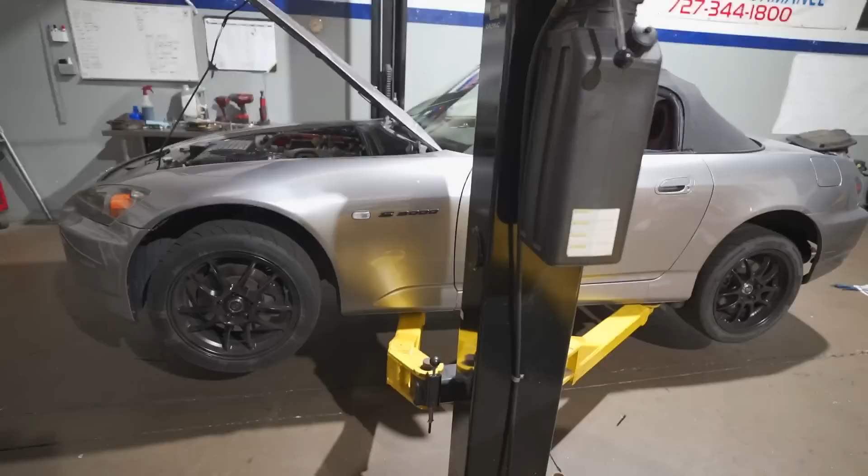2005 S2000, this has 130,000 miles. We purchased this car, it's going to be in a different video. It came with a Comptech icebox on there, so we want to do a comparison between that and the factory AirBox with our AirBox mod.

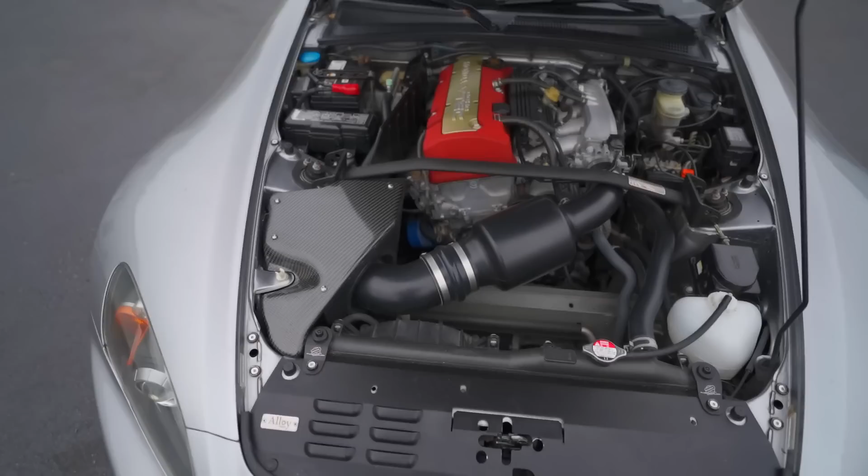That way we can show you exactly what happens. We're going to be kind of surprised ourselves, so stay tuned for the results. We're going to do it all on the same day, no tricks, no trying to sell you one intake over another. We don't sell intakes, so this is a complete unbiased test.

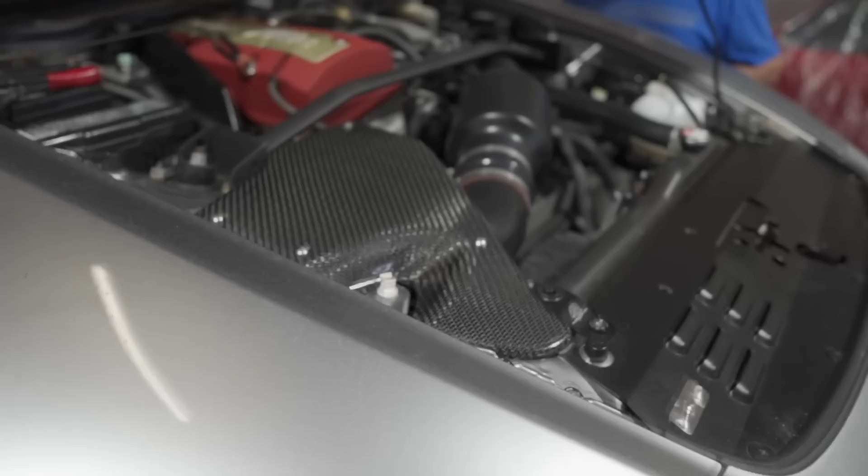So we're on the dyno. We're going to bring it up to temperature, do 2 runs with this intake, and then we'll let it cool down for a minute while we change it to the factory intake with a K&N filter. The strut bar has to be removed, obviously, to get the intake off.

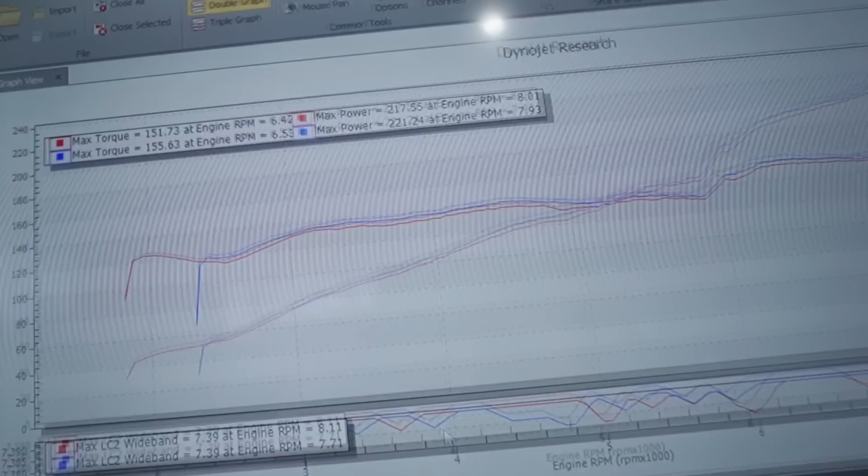221 that time, got a little bit of heat in the motor. That's a strong setup right there.

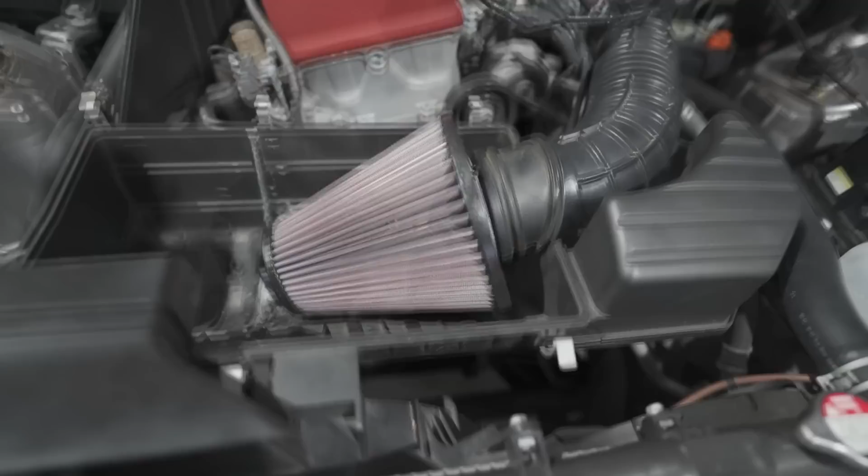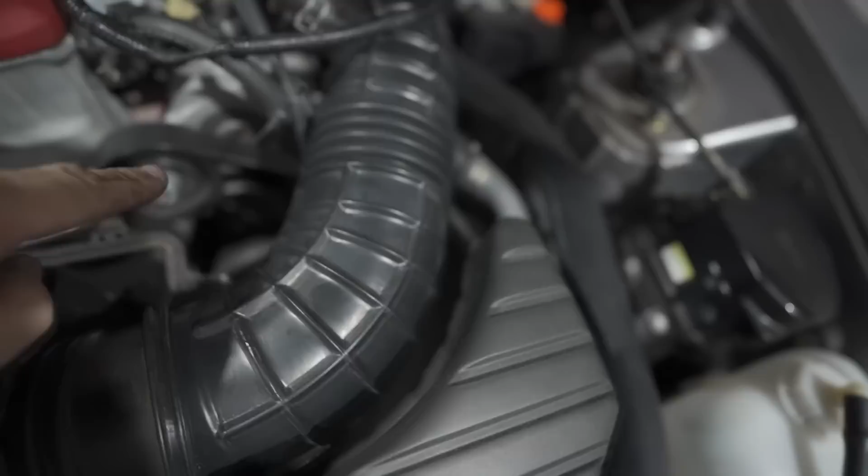So this already has an AirBox mod. It's not as clean as what we do, but the end result is the same. It has this piece cut out here, so it allows more air across the filter. Factory tube, the solenoid is already mounted on the frame. It was already put that way and relocated, so we're just going to leave it. That way, if it gets modified in the future, it gets a turbo, supercharger, intake, it's already mounted and out of your way.

So we're going to bring it up to temperature. As you saw in the other ones, it actually made more power once it had a little heat in it. And like I mentioned, over the years, I've noticed the higher mileage S2000s make a little bit more power than the low mileage ones. It seems like they break in and they're a little bit looser.

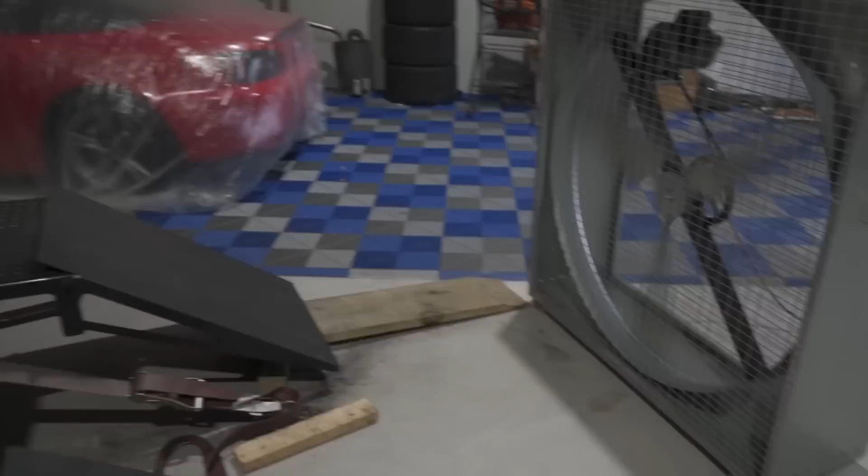Let's go ahead and do a run, see where we are at. We have the single fan blowing on it right now. We're not trying to trick this. Keep in mind, we're not making any money on intake, so we don't want to have one intake make more than the other. We have nothing to gain from it.

That intake VTEC changeover is so late. Unbelievable.

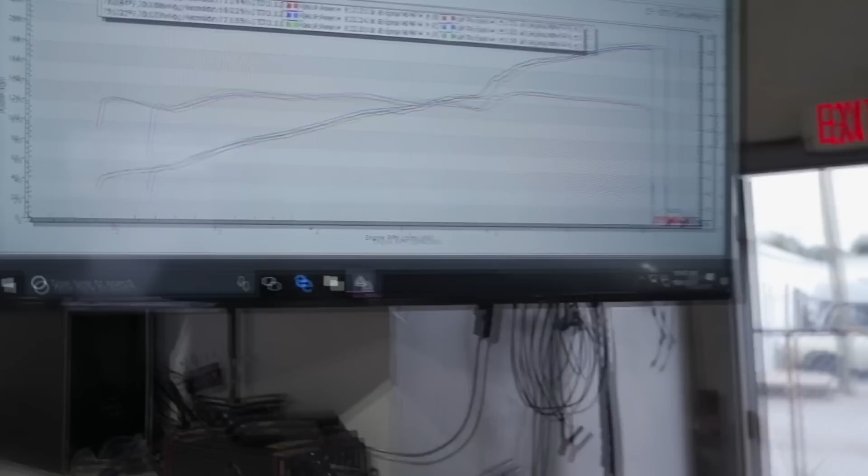Did you fake that? You guys are tricking it. You guys are trying to sell factory airboxes. I know it, you guys.

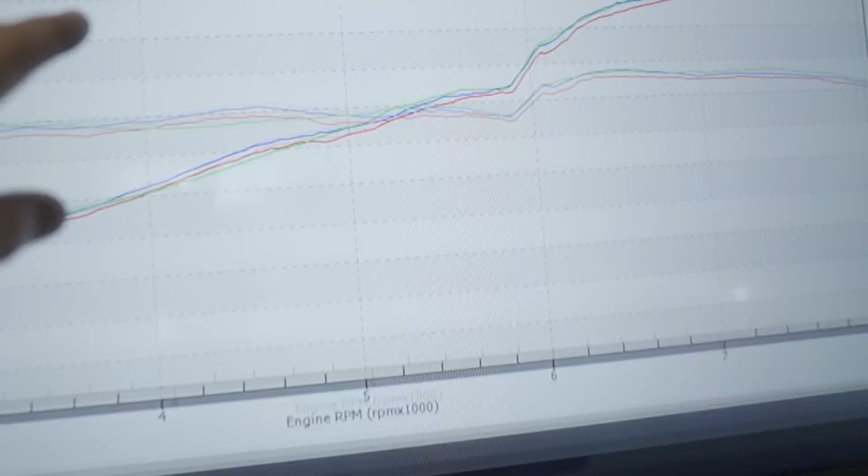So there we go, 223. It's only a little bit up there. I mean, all the way through here is pretty much the same. Torque is 156. Do another back-to-back run while it's hot. We'll do it continuous testing here, just so.

And again, I'm just joking, guys, we have nothing to gain from this. We don't sell intakes or airboxes, so we don't really care. Just hope you guys are following along and enjoying this test.

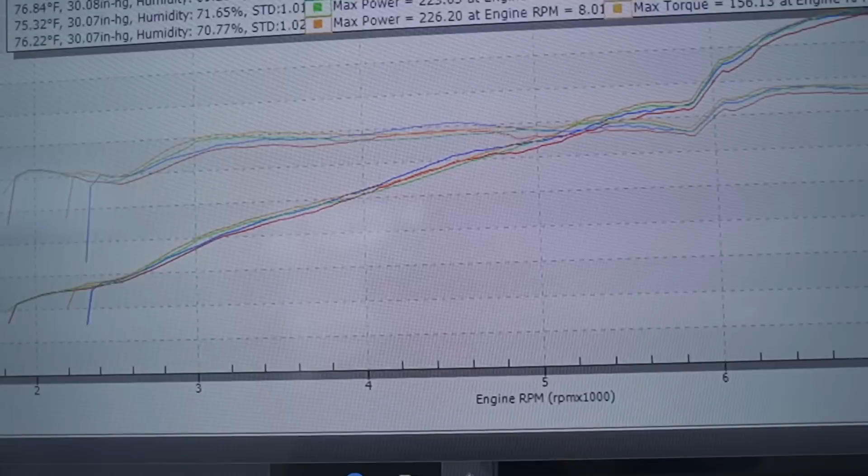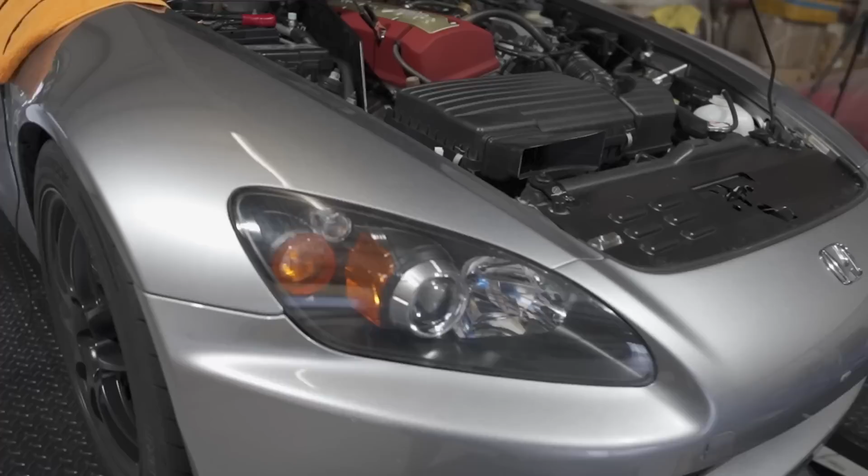226, this is actually interesting. So this is it, right? No tricking, there's no nitrous in it, no ice bags. This is just the way it sits. Fan is right here. And again, I'm trying to show you this because you guys think I've got some ulterior motive selling AirBox mods, and I really don't. I really don't, I'm trying to sell happiness.

Oh hey, you gotta clear the screen. There you go.

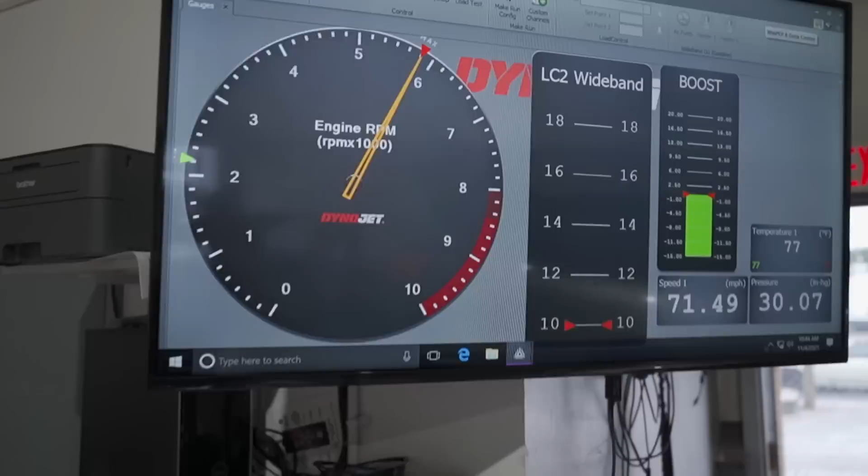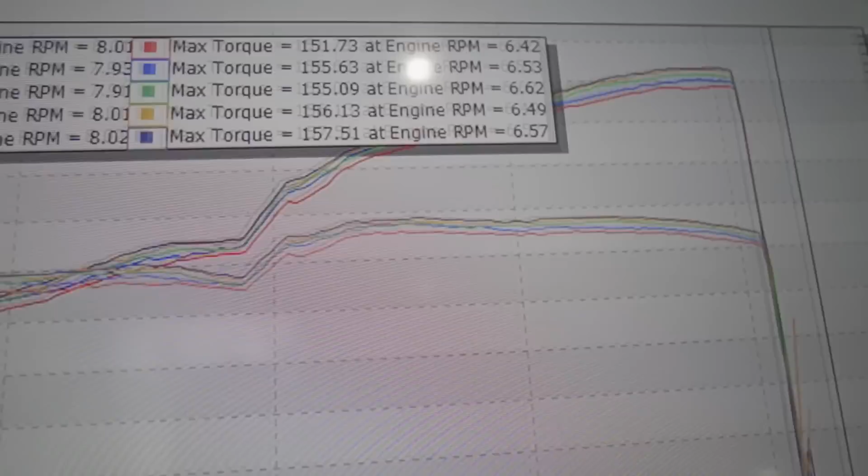226 again. 226, 157. It's definitely making power. It's a really healthy car.

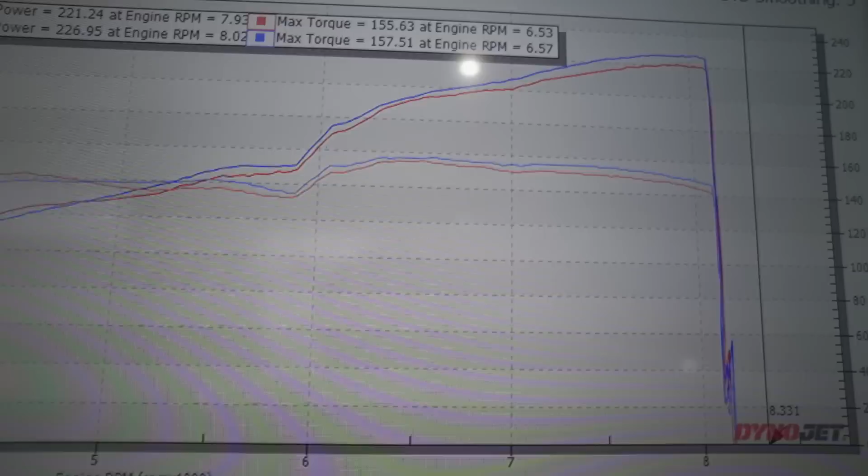So that was the best run with the intake and the best run with the AirBox mod. As you see, it actually makes more than I thought it did. And again, I won't try to sway your opinions on this, but it did make more, and I believe it's going to make more consistent power.

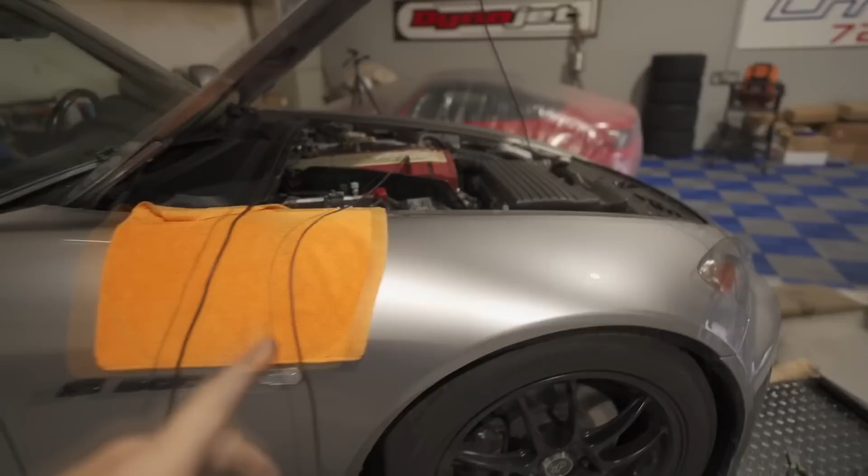Just run after run after run. Keep in mind how much Honda has done for this intake. This is sealing from the heat. There is so much heat here. If you saw some of our videos way back in the day, we used to sell a heat shield.

Yeah, we were the first ones to sell it. It was a carbon heat shield that went across here. My theory is it stopped the radiant heat into the airbox. I don't know if it worked. It definitely didn't hurt and it looked nice. But now we're only drawing cold air from here, which is where Honda's designed it to go. We're sealing the heat away.

This is a resonator box. Doesn't do anything. This tube is as smooth as any intake tube there is on the market. So that goes to show how good the factory S2000 airbox is. So with a little bit of tweaking, airbox mod, K&N filter, what else do you want?